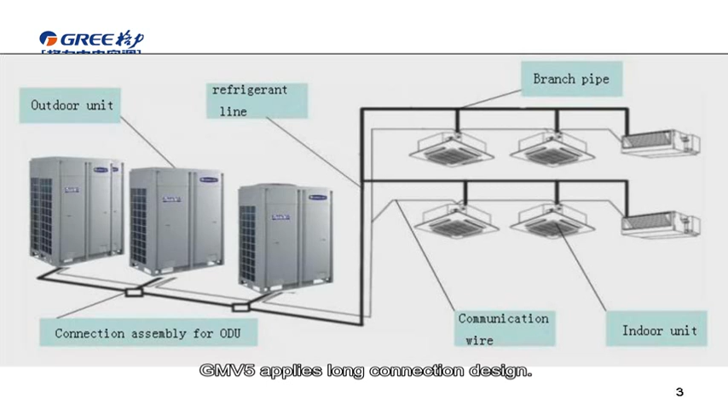The first part, product introduction, product installation features. Firstly, long connection pipe design. GMV5 applies long connection design. Maximum total pipe length reaches 1,000 meters. Maximum pipe length between indoor unit and outdoor unit reaches 165 meters. Maximum height difference between indoor unit and outdoor unit reaches 90 meters. Maximum height difference between indoor units reaches 30 meters. This design is adaptable to various complicated projects and greatly reduces installation difficulties.

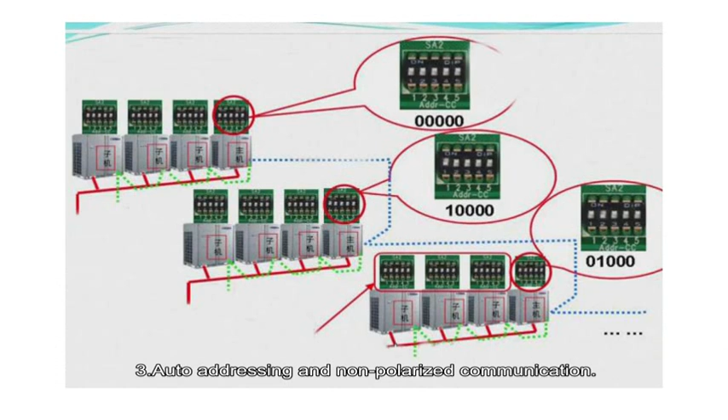Secondly, high static pressure design. When the unit is installed in the equipment room, relevant static pressure can be set according to the project status. The static pressure of GMV5 outdoor unit is up to 82 Pa. Thirdly, auto-addressing and non-polarized communication. Connection is flexible and installation is convenient.

The fourth, intelligent debugging. Debugging can be arranged through the button of outdoor unit and debugging software. During debugging, the system will track the quantity of indoor unit and outdoor unit and detect errors automatically. If there is an error, the unit will indicate the corresponding error so that the problems could be quickly solved.

The second part, installation project design. Firstly, model selection project design. A. Confirmation of operation environment. GMV5 can apply to office buildings, supermarkets, schools, hospitals, etc. Please select relevant type of unit according to the location. For some special sites with much dust and strong electromagnetic interference, sufficient evaluation and related measures shall be taken, such as adding filters and isolating power supply.

B. Confirmation of operation requirements. Please take sufficient communication with end users at the beginning of designing. Clearly understand users' operation demands, for example, indoor ambient temperature requirement, concrete object of using the unit, central control. C. Confirmation of project installation requirements. Communicate with the project consultant to see if the reserved installation space is sufficient and if the endurance of building is sufficient.

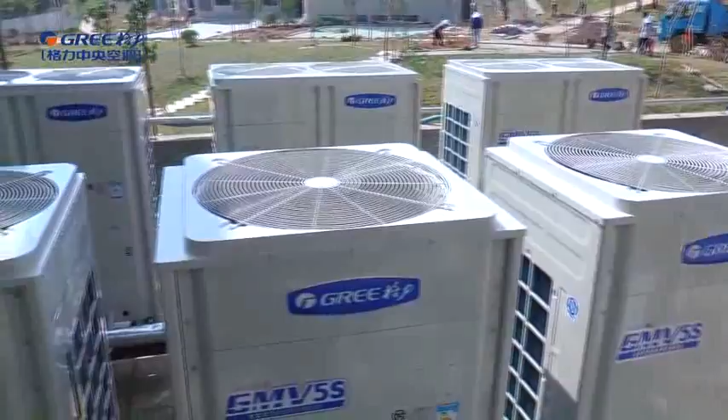D. Selection of relevant type of unit. Select the product according to the 3 basic requirements mentioned above. If the existing product cannot meet the requirement, please discuss with your pre-sales manager to work out a solution. The second part, installation project design. Installation project design includes: first, installation of outdoor unit. Second, installation of indoor unit. Third, installation of refrigerant pipeline. Fourth, installation of condensate pipe. Fifth, installation of power cable and communication cable.

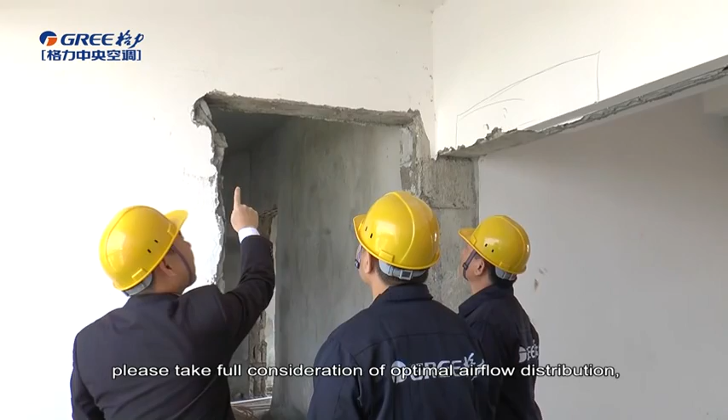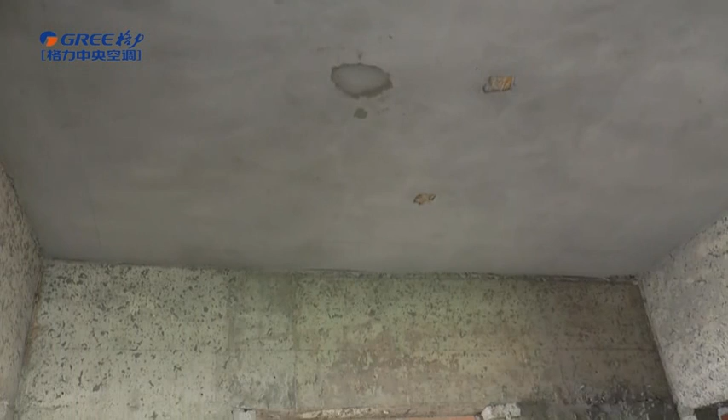Fifth, make sure the reserve power supply capacity and wire material comply with the requirement of the unit design. The power cable and communication cable shall be independent, and the parallel distance between them shall comply with the requirement of unit. The third part, unit installation. First, preparation before installation. Second, checking and installation of unit.

Installation security training. Personal safety is a top priority during the whole installation process. In this process, we must comply with related national and local safety regulations to ensure personal or property safety. Specialized workers must have professional certificates. For example, electricians, welders.

On-site review of design drawing. Installation team must carefully read and understand the design of scheme and drawings provided by engineering designers, and prepare detailed and feasible installation organization design after reviewing the on-site status. Note: installation team must strictly abide by the design drawings. If any design cannot be implemented during installation and needs to be modified, contact the designer first for approval and prepare a written document.

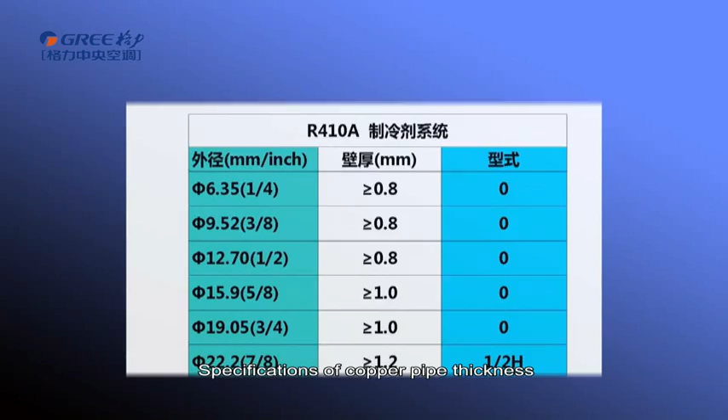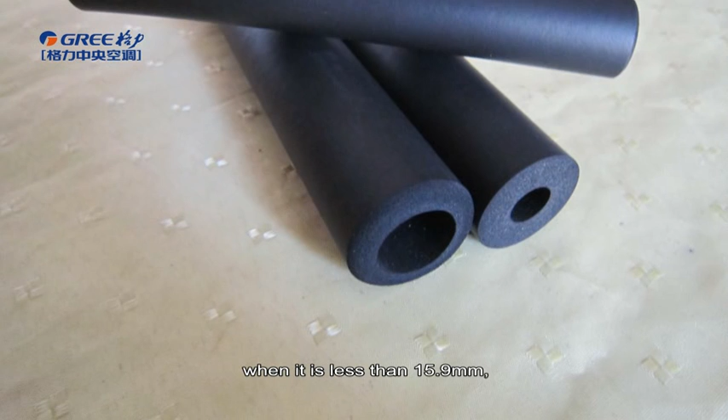Preparation before installation. Prepare the equipment before installation, including copper pipe, insulation material, hanger rod, and communication cable. All materials must comply with the design requirements. Specification of copper pipe thickness. The insulation material of copper pipe must be rubber foam insulation material with fire retardancy level of B1 or higher. When the diameter of copper pipe is equal to or greater than 15.9 millimeters, the thickness of insulation material should be at least 20 millimeters. When it is less than 15.9 millimeters, the thickness of insulation material should be at least 15 millimeters.

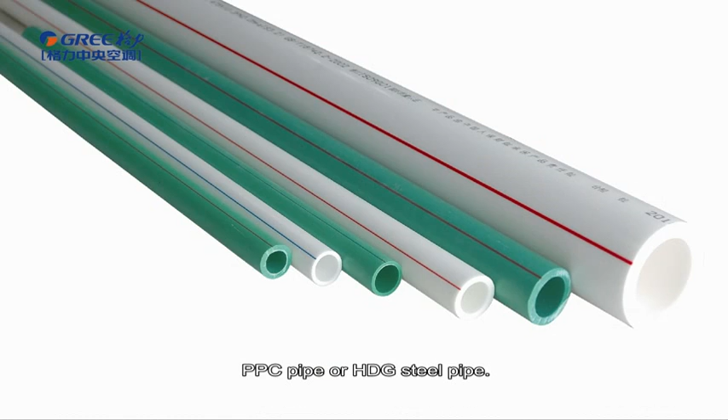Condensate pipe shall apply UPVC pipe, PPR pipe, PPC pipe, or HDG steel pipe. Communication cable shall apply twisted pairs copper wire with sectional area of copper core no less than 0.75 square millimeters.

For units installed in places with strong electromagnetic interference, shielded wire must be used as the communication cables of the indoor units and wire controller. The same goes for communication cables between indoor units and between the indoor unit and outdoor unit.

When all materials are prepared, please appoint a person responsible for keeping the materials appropriately to prevent them from dust, water, and fire. Preparation for installation tools. Prepare the following tools before installation: screwdriver, pliers, shifting spanner, pipe cutter, torque spanner, pipe pliers, pressure gauge, level bar, electric drill, electronic balance, vacuum pump.

Checking and installation of unit. Checking and installing unit. When the equipment is brought to the installation site, please open the carton boxes and check the indoor units, outdoor units, and accessories. To avoid rework due to equipment defect after finishing installation, install the units only after checking everything is okay. Checking indoor units.

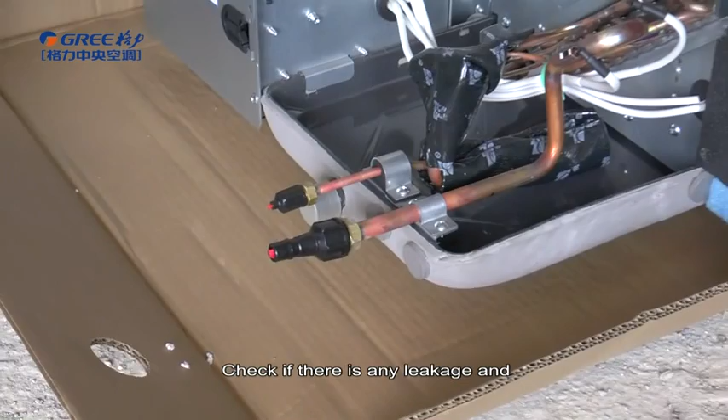Check if the appearance is good and accessories are equipped. Check if there is any leakage and if the pipeline is charged with refrigerant. Sticking the thimble of pipe joint. If there is gas discharge, it means that the unit is okay. Otherwise, please check if there is any leakage in the indoor unit or replace the indoor unit.

Checking outdoor unit. Check if the appearance is good and accessories are equipped. Check if there is any oil mark on the pipeline and traces. If there is oil mark, it means there is leakage in the outdoor unit. Please check the outdoor unit or replace it. Checking accessories. Check if the accessories are equipped with the unit according to the accessory list.

Installation of indoor unit. Steps to install the indoor unit. First, select the correct installation site. Second, drilling holes and fixing hanger rod. Third, fixing and installing indoor unit. Fourth, checking and adjusting level of indoor unit. Fifth, dust prevention.

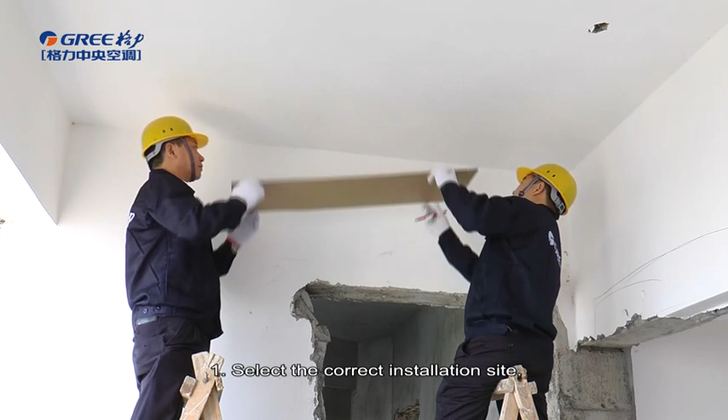First, select the correct installation site. Confirm the hole drilling location of suspending indoor unit with the reference cardboard provided in the indoor unit carton box. Note, take full consideration of pipeline installation and maintenance space during locating. Make sure there is no obstacle within 200 mm from the air return opening of duct-type indoor unit.

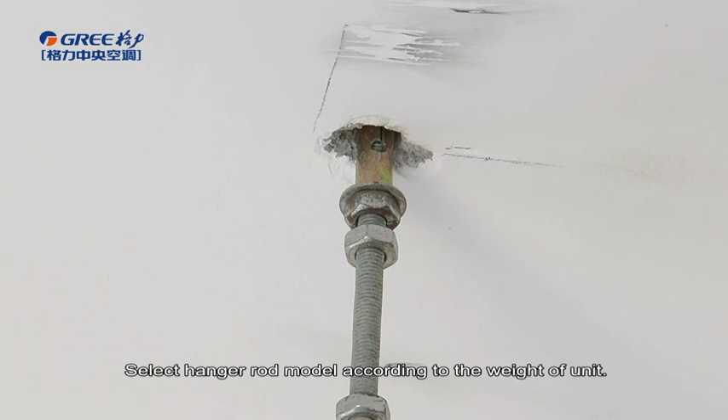Second, drilling holes and fixing hanger rod. Select hanger rod model according to the weight of the unit. For unit below 5 horsepower, M8 hanger rod shall be used. For unit above 5 horsepower, M10 hanger rod shall be used.

Third, fixing and installing indoor unit. In order to avoid accidents, several people shall cooperate for suspending the indoor unit. Please pay attention to the following points during installation. A. Indoor units shall be fixed independently and cannot share the same hanger branch with other equipment or pipeline. B. 4 pieces of hanger rod must be used during suspending. The hanger rods cannot be inclined after finishing installation of unit.

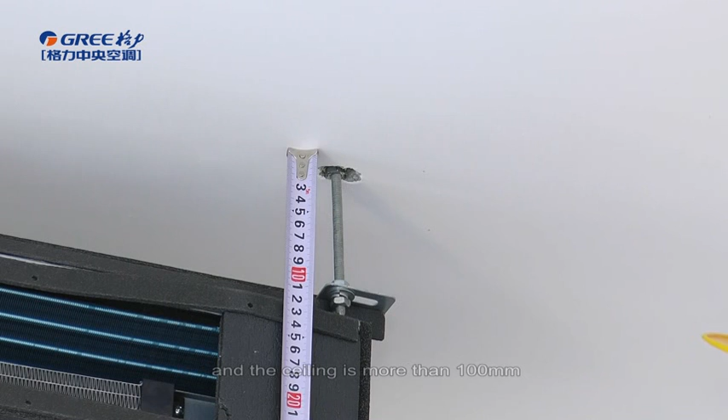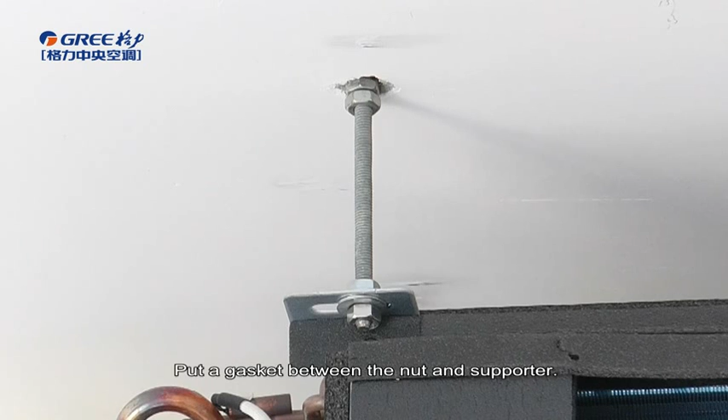C. Make sure the distance between the unit and the ceiling is more than 100 mm during installing indoor unit. D. Fix the indoor unit with 2 nuts in each hanger rod. Put a gasket between the nut and the supporter. Fix the hanger rod and floor with flat gasket and nut. If there is a special damping requirement, please put the damping gasket. If the hanger rod is longer than 1.2 meters, please apply 2 supports at the diagonal to avoid vibration.

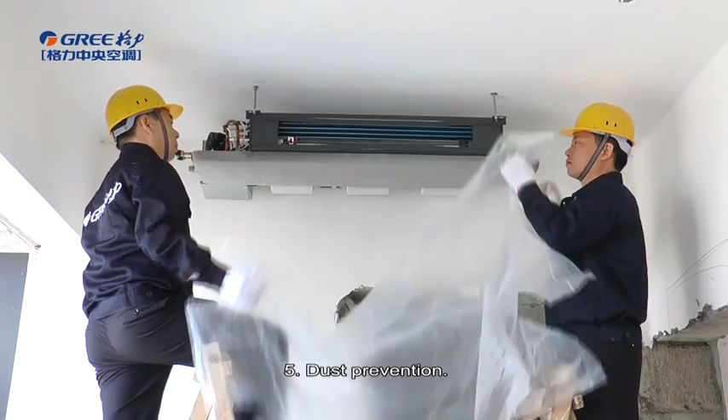Fourth, checking and adjusting level of indoor unit. After finishing installation, check the level of unit with level bar and make sure the unit is horizontal. The unit shall incline towards the drainage direction with height difference between 2 lifting lugs of 6 to 8 mm. Fifth, dust prevention. Wrap the unit with its plastic bag to prevent dust and impurities getting into the unit.

Installation of outdoor unit. Steps to install outdoor unit. First, prepare the foundation. Second, installation of damping rubber pad. Third, carry the outdoor unit. Fourth, fixing outdoor unit.

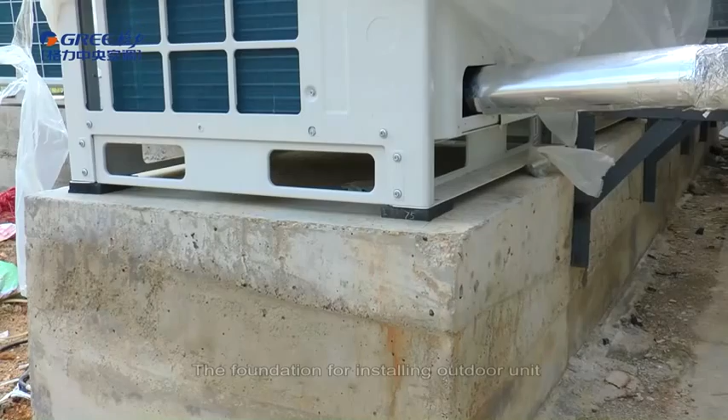First, prepare the foundation. The foundation for installing outdoor unit must be strong enough. Ensure that the drainage is smooth and that the ground drainage or floor drainage is not affected. We must use concrete foundation. Requirements on the concrete foundation are as follows. The concrete foundation must be flat and have enough strength to undertake the unit's running weight.

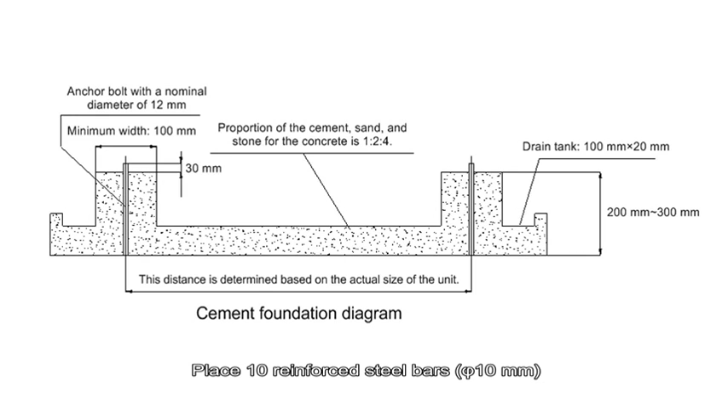The height of the foundation is 200 mm to 300 mm, which is determined based on the size of the unit. The proportion of the cement, sand, and stone for the concrete is 1 to 2 to 4. Place 10 reinforced steel bars with a space of 30 mm among each other. Clear the oil stains, crushed stones, dirt and water in the reserve borehole of the foundation, and install a temporary cover before installing bolts.

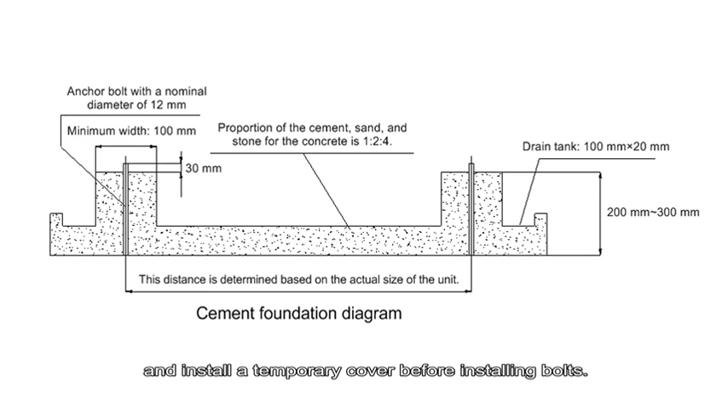Build a drainage ditch around the foundation to discharge the condensate water. If the unit is installed on the roof, please check the intensity of the building and take waterproof measures. If a U-steel foundation is adopted, the structure must be designed with sufficient rigidity and strength.

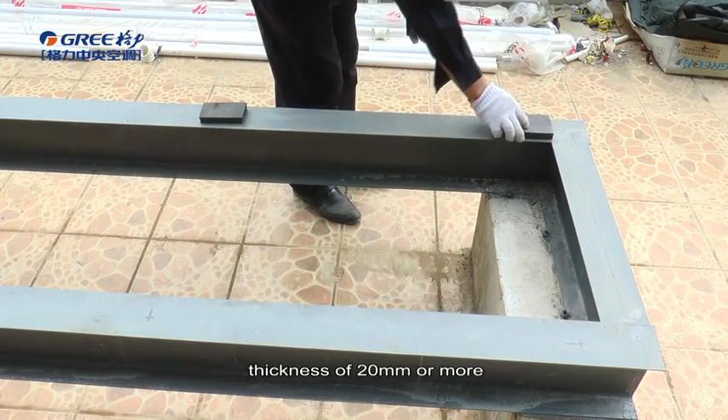Second, installation of damping rubber pad. Please apply a damping rubber pad with thickness of 20 mm or more and width of 100 mm or more between the outdoor unit and the foundation.

Third, carrying outdoor unit. Choose a suitable crane according to the weight of outdoor unit. The rope shall go through the carrying holes at the base. The unit cannot be inclined during carrying. Fourth, fixing outdoor unit. Fix the outdoor unit to the foundation with 4 M12 bolts securely to reduce vibration and noise.

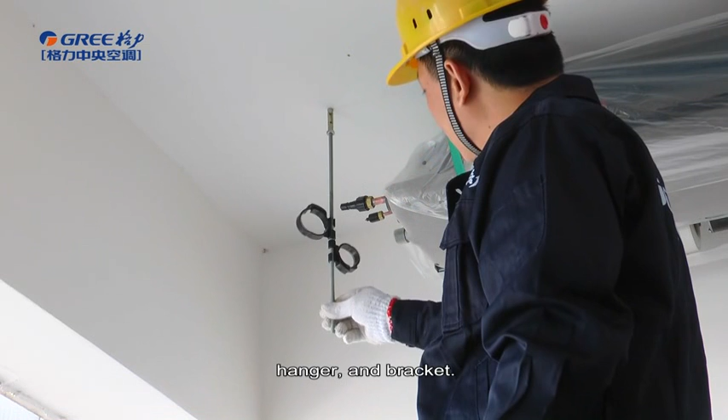Installation of refrigerant pipes. Steps to install the refrigerant pipes are as follows. First, preparing and installing the support, hanger, and brackets. During preparing and installing, choose the corresponding specification according to size of pipeline. If they are too small, the pipeline will be squeezed and insulation performance will be affected. If they are too big, it will be a waste of money and the pipeline cannot be fixed properly, which may cause vibration.

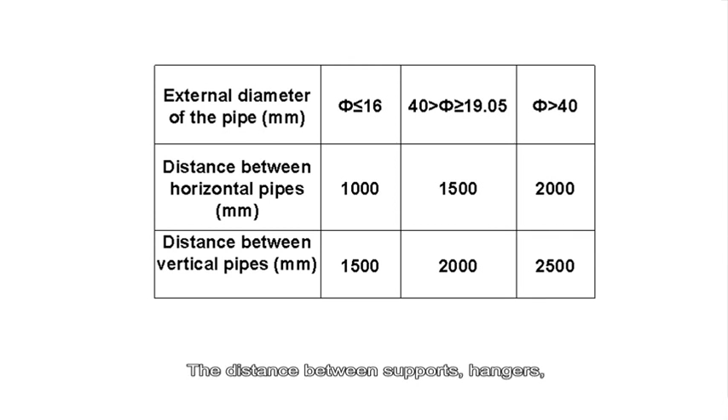The style and workmanship of supports, hanger, and brackets must follow the local standards. The distance between supports, hangers, and brackets is as shown in the diagram. The pipe led through a wall or beam must be fixed by a support, hanger, or bracket on both ends at a position 300 mm away from the hole.

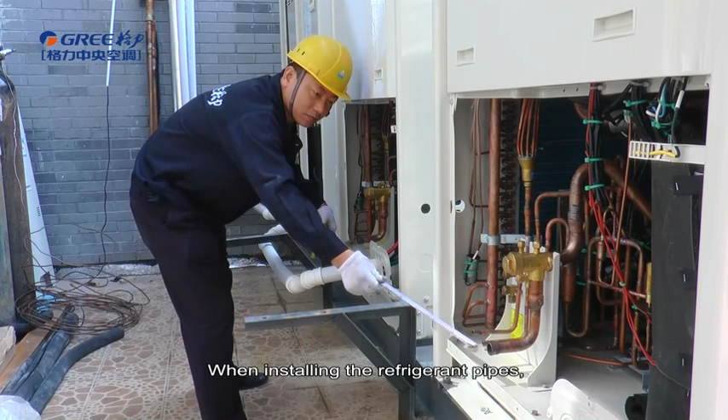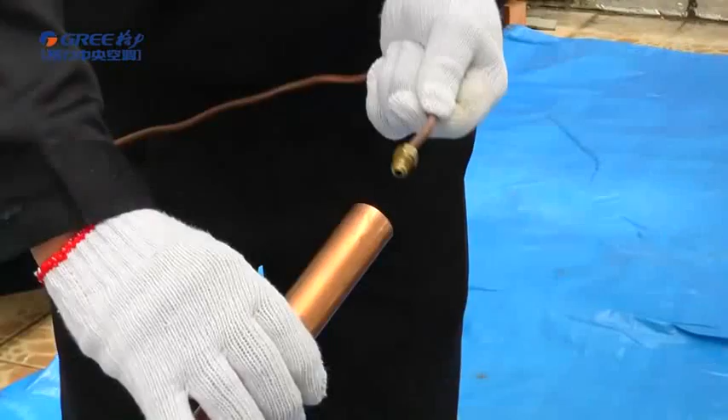Second, cleaning and processing the pipe. When installing the refrigerant pipes, please ensure the directions and branches are correct within minimum length. Use minimum number of braze welding junctions and elbows. There are two ways to clean the pipes. The first way is cleaning straight pipes with a piece of silk cloth. Apply some chlorine to the cloth. Push the cloth in one end of the pipe and pull out from the other end repeatedly to remove the sundries in the pipe. The other way is cleaning coils by blowing nitrogen through the pipe.

After cleaning, cover both ends of the pipe with sealing caps or adhesive tape immediately to avoid sundries getting into the pipe. Third, pipeline insulation. When adding the insulation sleeve, please select the sleeve specification according to the copper pipe diameter. Users cannot cut the insulation sleeve apart.

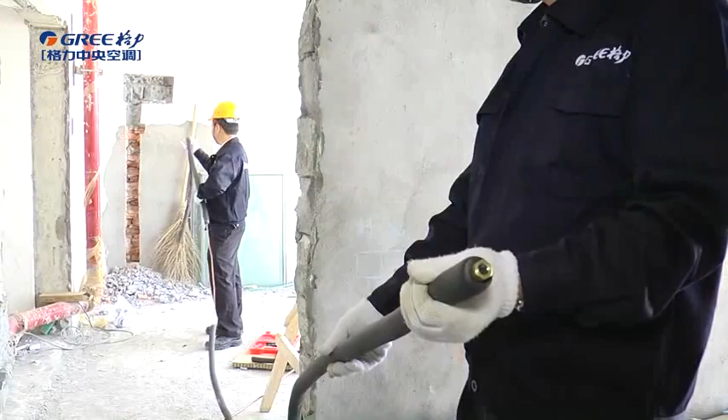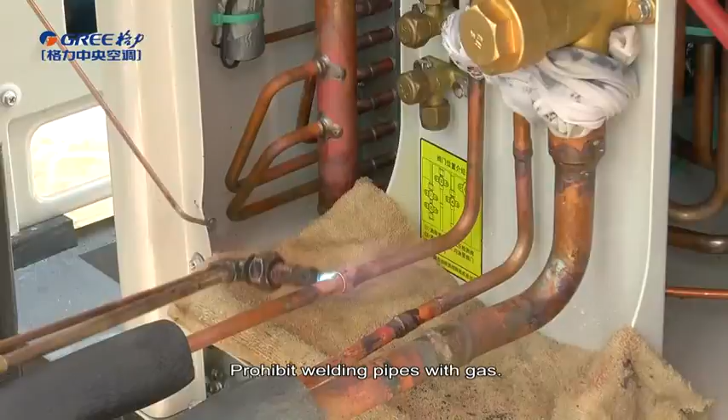Fourth, connecting and fixing the pipe. During welding the pipeline, please follow the regulations strictly. Prohibit welding pipes without charging nitrogen. Prohibit welding pipes with gas. Prohibit fixing the pipe too tightly or too loosely. Please adjust the flexuous pipe strictly. Before connecting the flare opening of the pipe to the indoor unit, please clean the pipe first and then arrange welding or connection.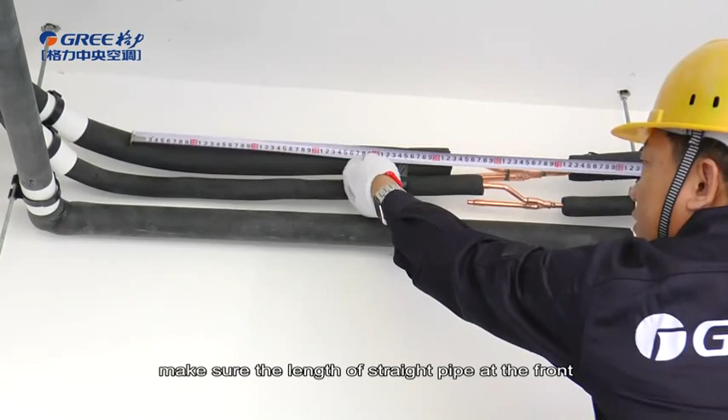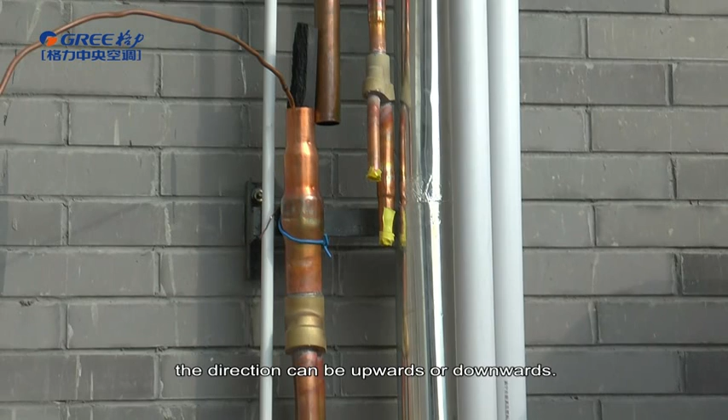Installation of branch pipe. Requirements of branch pipe installation are as follows. A. Ensure that the branch pipe model is correct. B. During installing branch pipe, make sure the length of straight pipe at the front and at the back of the 3 connection pipes is no less than 500 mm. C. There are 2 methods of branch pipe installation. A. In horizontal installation, the 3 ports must be on the same level. The shaping size and assembly angle cannot be changed. B. In vertical installation, the direction can be upwards or downwards. 3 ports must be on the same elevation without inclination.

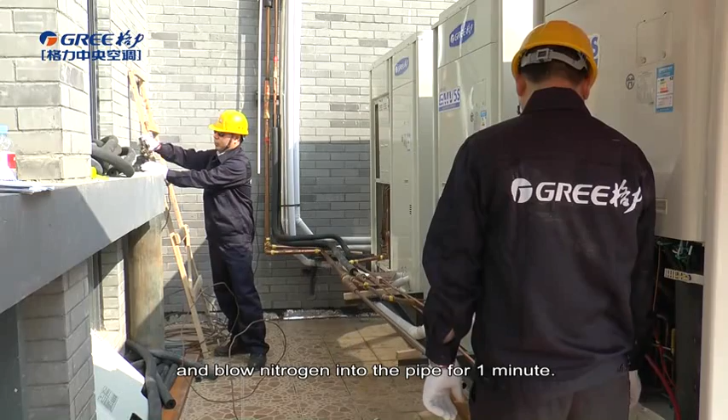D. Ensure that the branch pipe is close to the indoor unit to reduce impact on refrigerant assignment by indoor unit branches. Fifth, cleaning the contaminants of pipe system. Firstly, connect a pressure regulation valve on the nitrogen cylinder to the gas pipe in the outdoor unit. Regulate the nitrogen pressure to about 0.5 megapascal and blow nitrogen into the pipe for 1 minute. Repeat this operation for 3 times till the dirt and water are discharged. After cleaning the gas pipe, perform the same operation to clean the liquid pipe.

6th, airtight test. Refrigerant leakage may affect functions of the units or even damage the compressor. If refrigerant leakage is detected after the system is installed, it is very difficult to locate the leaking point as the suspended ceiling has been decorated. Therefore, the airtight test must be performed before ceiling for indoor decoration is finished. Please follow the operation instructions in the service manual. Note, during the airtight test, prohibit connecting the pipeline of outdoor unit.

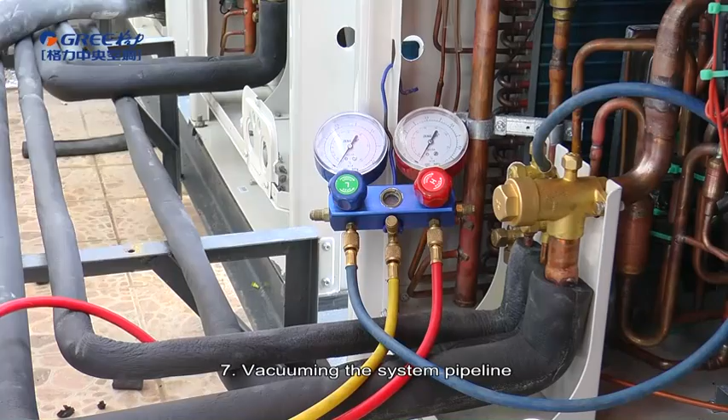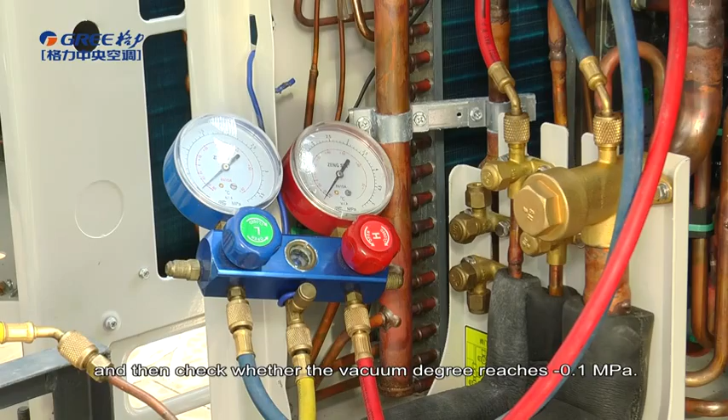7. Vacuum the system pipeline. After finishing the airtight test, please connect the outdoor unit pipeline to arrange vacuum. The air discharge capacity of the vacuum pump must be greater than 4 liters per second. The precision of the vacuum pump must be greater than 0.02 millimeters of mercury. After connecting the vacuum pump, let the vacuum pump operate continuously for 4 hours and then check whether the vacuum degree reaches minus 0.1 megapascal. If not, leakage may exist and please perform leakage check again. If no leakage exists, continue to vacuum for 2 hours.

If the vacuum degree cannot meet the standard after vacuuming twice, there may be water in the pipe when it is confirmed that no leakage exists. In this case, discharge water by blowing nitrogen. Perfuse nitrogen at 0.05 megapascal to the pipe, and then vacuum for 2 hours and keep the vacuum for 1 hour. If the vacuum degree of minus 0.1 megapascal cannot be reached, repeat this operation till water is discharged. After vacuuming, turn off the regulation valve and keep for 2 hours. If the pressure of the regulation valve does not increase, vacuum is passed.

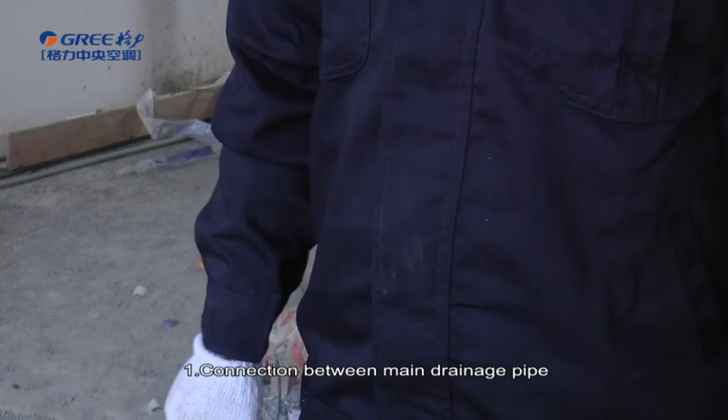Installation of condensate pipe. First, connection between main drainage pipe and drainage pipe of indoor unit. A ventilation hole must be provided on the top of the drainage pipe to discharge condensate water smoothly. Perform a test with some water and another test with full water in the pipe after connecting the pipe. Check whether drainage is smooth and whether water leakage exists in the pipe system.

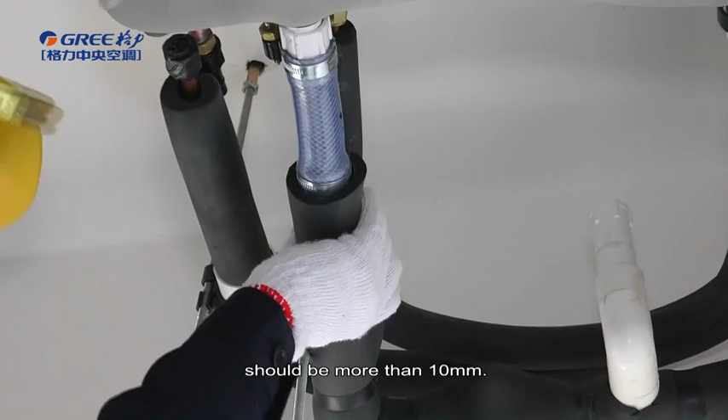The insulation layer thickness of condensate pipe should be more than 10 millimeters. Bond the insulation material joints with specialized glue. Then wrap them with plastic adhesive tape. The width of the adhesive tape is more than 5 centimeters to prevent dewing.

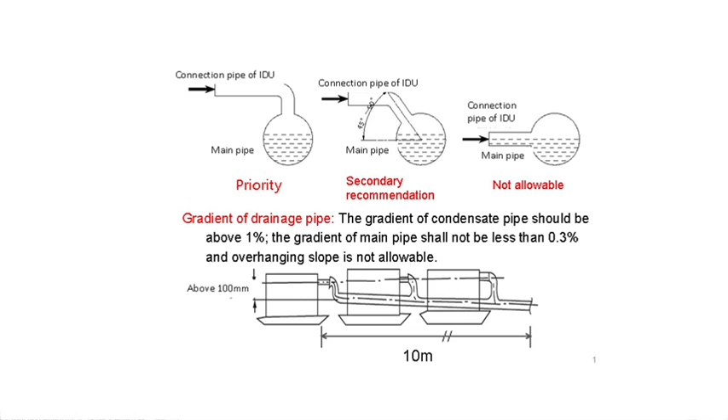Third, the inclination degree of the condensate pipe must be above 1% and that of the main pipe cannot be lower than 0.3%. Adverse slopes are not allowed. Fourth, when connecting three-way pipes, the two-way straight pipes must be laid on the same slope.

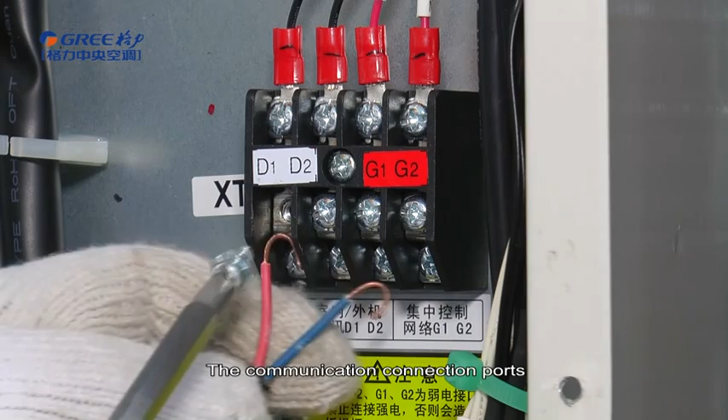Installation of communication cable. The communication connection ports between indoor units are D1 and D2. The communication connection ports between indoor unit and wire controller are H1 and H2. In communication installation, please differentiate the communication cable and power cable clearly. If they are connected wrongly, the main board of the indoor unit may be damaged. Go through pipe and connect wire independently.

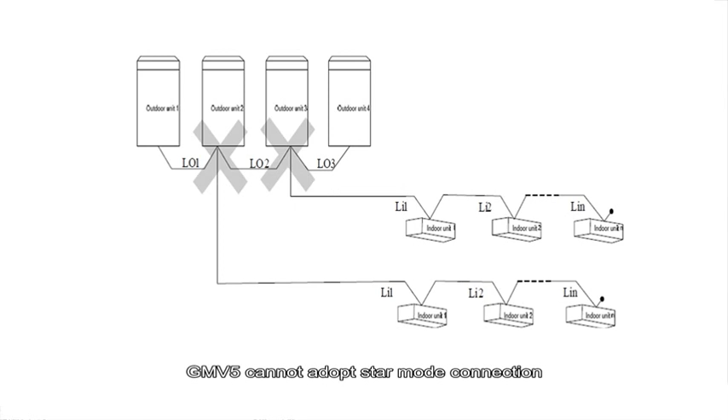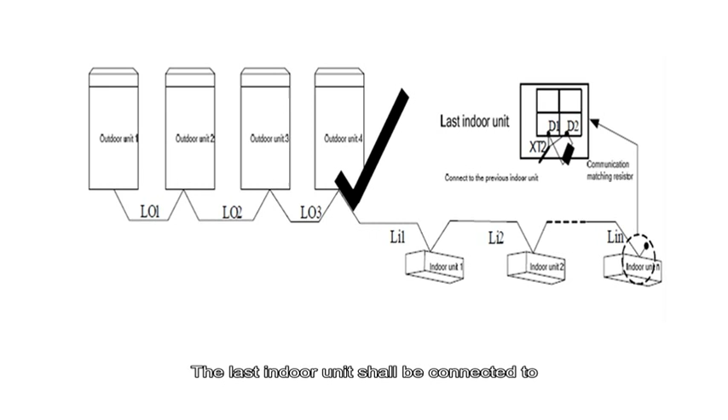GMV5 cannot adopt star mode connection. GMV5 must adopt bus type communication way. The outdoor unit at the beginning of communication shall be set as master outdoor unit. The last indoor unit shall be connected to a communication matching resistor. The resistor is placed in the package of outdoor unit.

Installation of power cable. Precautions of installing power cable. Ground cable must be connected. The yellow-green wire inside the unit is the grounding wire. It cannot be used for other purposes or be cut off. Do not fix it with tapping screws, otherwise an electric shock may be caused. A reliable ground terminal must be provided for the power.

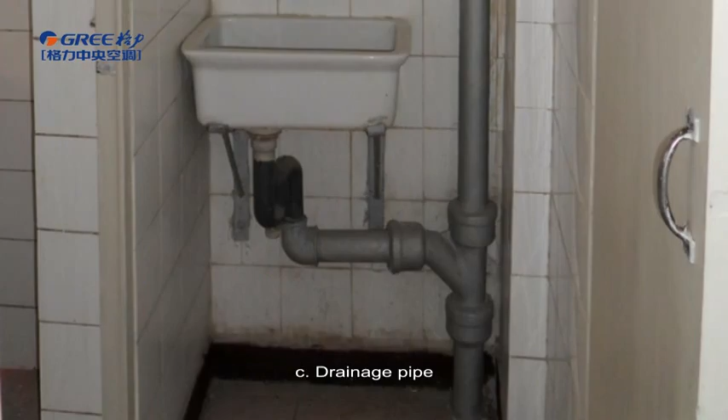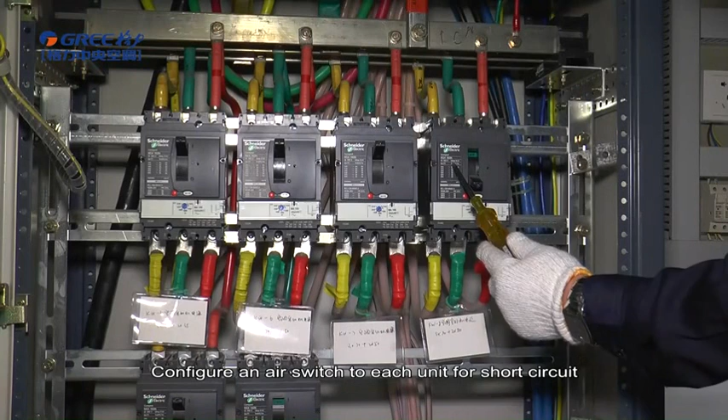Do not connect the ground cable to any of the following: A. Water pipe, B. Gas pipe, C. Drainage pipe, D. Other unreliable places. The power cable and the communication cable must be laid separately with a distance of greater than 20 centimeters. Configure an air switch to each unit for short-circuit and overload protection. In addition, configure a general air switch to switch on or switch off the total power of indoor units and outdoor units.

Unit commissioning. First, notes. A. It is forbidden to directly connect the compressor with power supply and forcibly power it on during debugging and maintenance. B. Debugging must be performed on the GMV system before system operating. C. If the GMV system is not in debugging, the mainboard of outdoor unit displays module address of 0F A0 and that of indoor unit displays A0.

D. An outdoor unit must be set as master module and only one master module can be set during debugging. E. An indoor unit must be set as master indoor unit and only one can be set during debugging. F. Please keep the factory settings if there are no special requirements. G. Debugging can be performed even when the wire controller is not connected. It can avoid damage on the wire controller.

Second, preparation for debugging. A. Make sure that the following tools are prepared before debugging. B. Make sure that the debugging software is correct before debugging. C. Make sure that all required files and parameters are prepared. Third, check the system before debugging. System checking mainly includes: first, check the installation environment. Second, check the appearance of units. Third, check the refrigeration system. Fourth, check the electrical system.

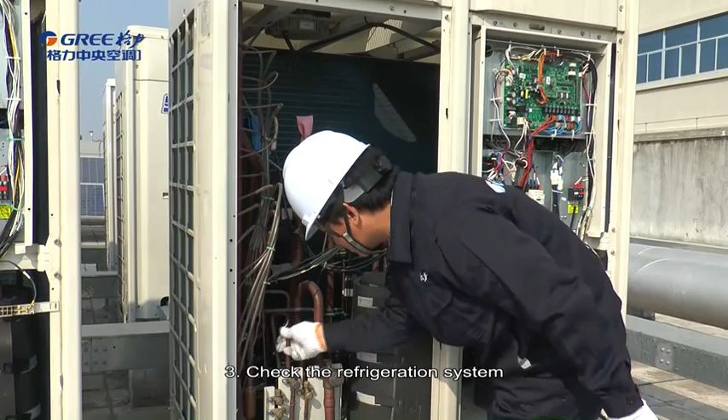Third, check the refrigeration system. Before debugging, make sure that the cut-off valves are fully opened. Check whether there is any oil leakage around the valve.

Fourth, check the electrical system. A. Check for high electromagnetic interference, dust, and acid or alkaline gas in the operating environment. B. Check the surface of power cable. C. Check the power capacity required for the unit. D. Check the installed air switch model, fuse model, and their using methods. E. Check the components in the electrical box. F. Check the input power and check power consistency.

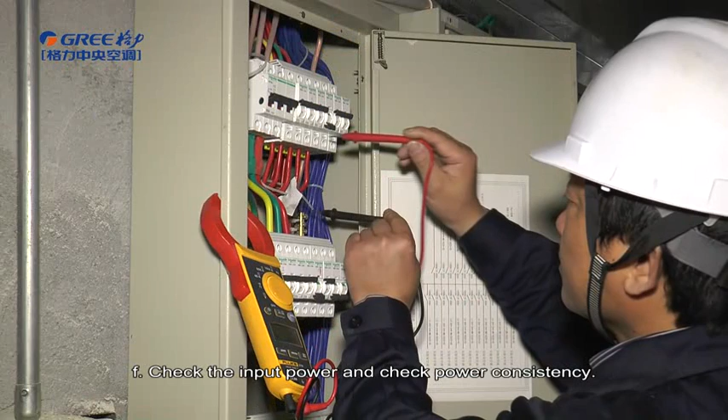Check phase sequence. After powering on the unit, measure whether the value of power supply is normal. Check communication system. Before debugging, make sure the communication cable and power cable are connected correctly.

Debugging process. Precautions before starting debugging. First, before starting debugging, make sure that the unit compressor has been preheated for more than 8 hours. Check whether preheating is normal by touching the compressor. Debugging can be started only when preheating is normal, otherwise the compressor may be damaged. Second, when debugging is started, the system will select an operation mode according to the ambient temperature automatically.

Third, before starting debugging, make sure again the cut-off valve of outdoor unit has been completely open. Fourth, during debugging, the front panel of outdoor unit must be completely covered. Otherwise, debugging accuracy may be affected. Fifth, before debugging, make sure that the additional refrigerant charging to the system has finished completely or for more than 70%.

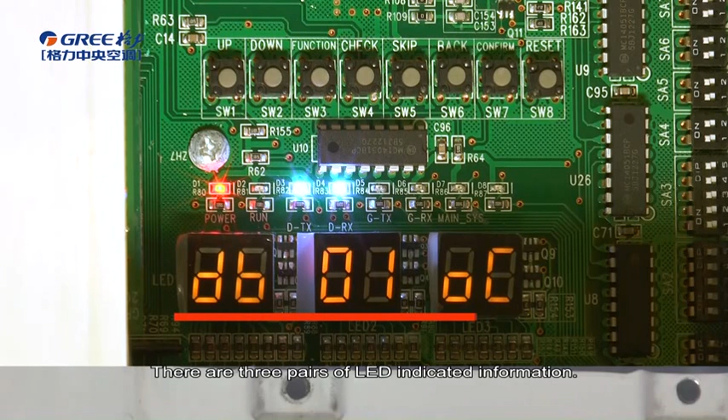Introduction of debugging methods. GMV 5 provides two debugging methods. One is to perform debugging through the mainboard buttons of outdoor units. This method doesn't need specialized tools and can be performed by engineer on site. There are three pairs of LED indicated information. LED 1 shows the debugging code, LED 2 the debugging progress code, and LED 3 the debugging status.

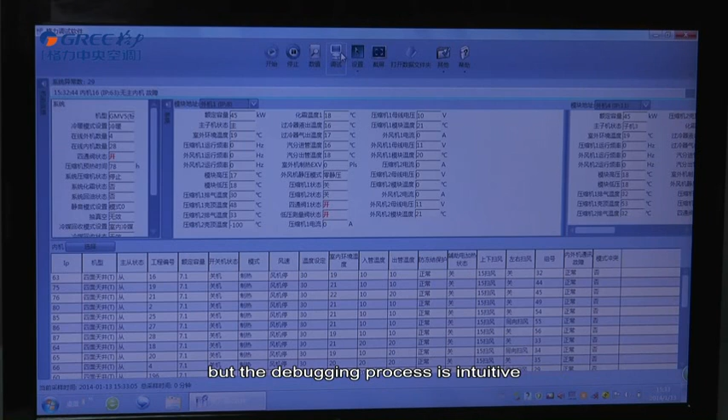The other is to perform debugging through professional software. In this method, connecting computer is required, but the debugging process is intuitive and real-time detection of operation parameters is available. Next, detailed steps of the two debugging methods will be given.

Debugging through the mainboard buttons. Step 1. Completely cover the front panel of outdoor unit and open debugging windows of all basic modules. Step 2. In power off status, set the outdoor unit to a corresponding static pressure mode according to the static pressure design requirement for outdoor unit. For more details about the setting method, please read the installation, debugging, and maintenance manual. If there are no static pressure requirements, keep the factory settings.

Step 3. In power off status, set one outdoor unit as master unit by keeping its SA8 dip switch in 00 factory setting status. Set other modules as slave module by setting SA8 dip switch to 10.

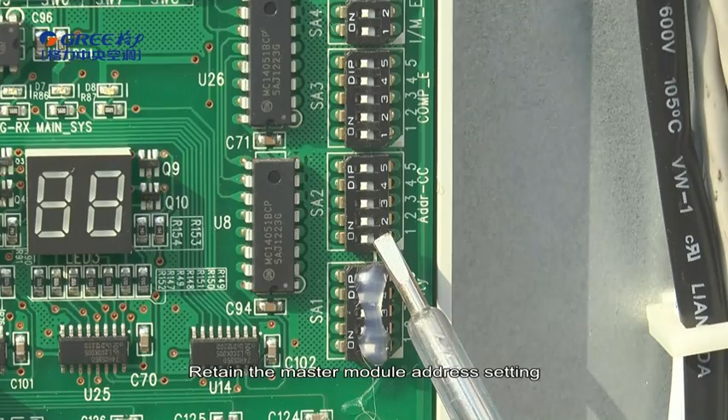Step 4. If centralized control is required, set the centralized control address SA2 in power off status of outdoor unit. Retain the master module address setting of one system in 00000 status. The centralized control addresses SA2 of other systems' master modules cannot repeat. Note, you could retain default settings for slave modules, and it is not needed to set the slave module SA2 dip switches of all systems. If centralized control is not required, you could keep default settings, and it is not needed to set this dip switch.

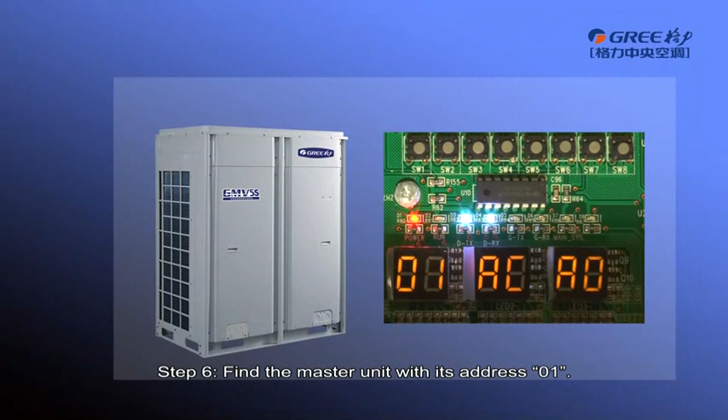Step 5. Power on all outdoor units and indoor units. If LED 3 displays A0 on the mainboard of all outdoor units, it indicates that the unit is on the non-debugging status. Step 6. Find the master unit with its address 01. On the master unit, press Confirm button for 5 seconds to begin debugging.

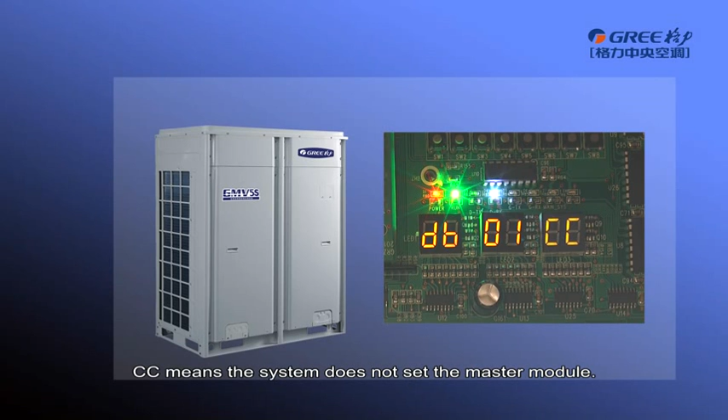Step 7. Wait for the unit to operate debugging step 1 and 2 automatically. If the master module is incorrect, error code CC or CF will display on the LED 3. CC means the system does not set the master module. CF means the system has more than 2 master modules. When the master module has been set successfully, LED 3 will display OC and it will enter step 2 automatically.

If no master indoor unit is detected in step 2, LED 3 will display error code L7. In this case, all outdoor unit buttons are temporarily not functional. Users can set the master indoor unit through debugging software, wire controller, or remote controller within 1 minute. If no master indoor unit is set within 1 minute, the system will set a master indoor unit automatically. Then the system enters the next step automatically.

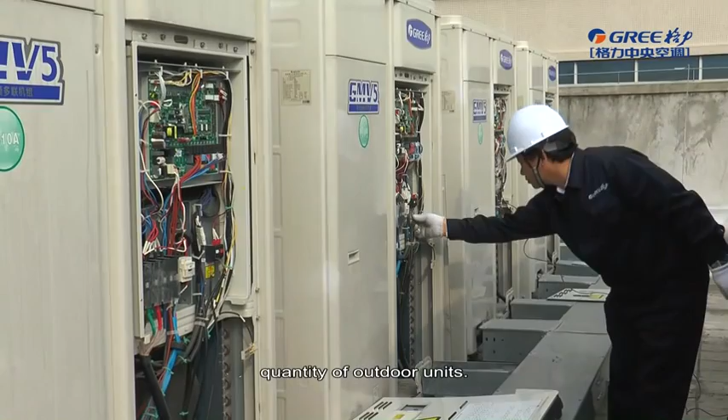Step 8. Step 3 is to confirm quantity of outdoor unit. If the display quantity is consistent with the actually connected units, the unit enters step 4 automatically. If the display quantity is inconsistent with the actually connected units, power off the outdoor units and check whether the communication cables are connected correctly. Then perform debugging again. Note, it is very important to confirm the quantity of outdoor units. If the confirmed quantity is inconsistent with the actual quantity, the system may run improperly.

Step 9. Step 4 is to confirm the quantity of indoor units. If the display quantity is consistent with the actually connected indoor units, please press Confirm button to enter Step 5. If the display quantity is inconsistent, please check whether each indoor unit is powered on and then check whether communication cables are connected correctly.

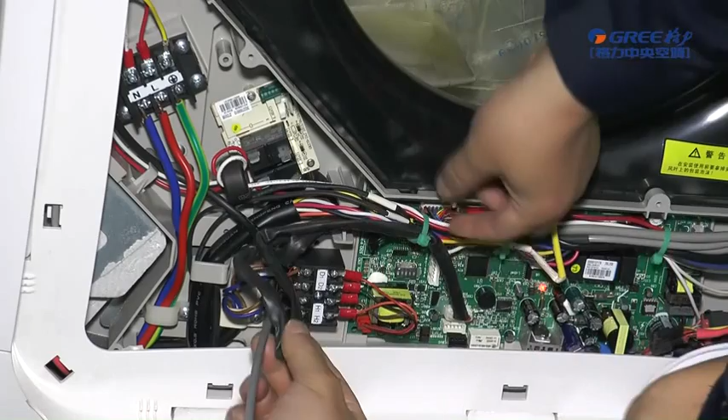Note, it is very important to confirm the quantity of indoor units. If the confirmed quantity is inconsistent with the actual quantity, the system may run improperly.

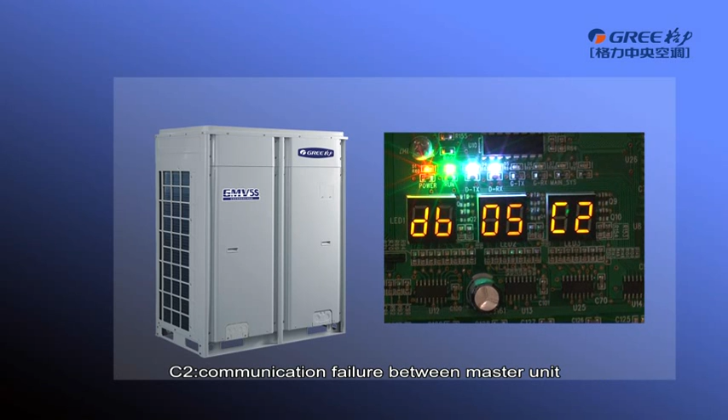Step 10. Step 5 is unit internal communication and capacity matching detection. If the detection is abnormal, the unit will retain the current status. The errors could be C3, communication failure between master unit and fan driver. C2, communication failure between master unit and compressor driver.

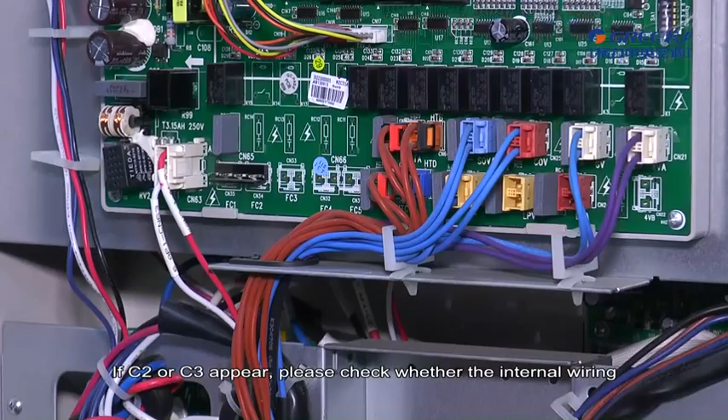CH, rated capacity ratio between indoor unit and outdoor unit is too high. CL, rated capacity ratio between indoor unit and outdoor unit is too low. If C2 or C3 appear, please check whether the internal wiring and the mainboard are in good condition.

If CH or CL appear, please increase or decrease indoor unit quantity to ensure the ratio within 50 to 135%. If LED 3 displays OC, the unit will enter the Step 6 automatically.

Step 11. The Step 6 is outdoor unit electric component detection. If the detection is abnormal, the unit will retain the current status. If the detection is OK, OC will display on LED 3 and the unit enters the Step 7 automatically.

Step 12. The Step 7 is indoor unit electric component detection. If the detection is abnormal, the unit retains the current status. The LED 3 displays the 4-digit project number of the indoor unit. The corresponding error code will be displayed after 3 seconds.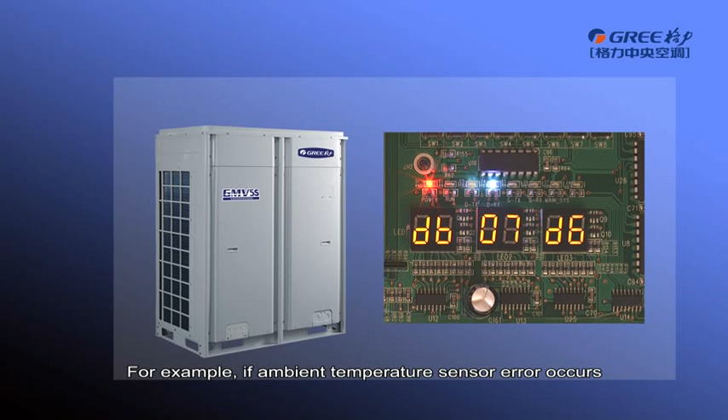For example, if ambient temperature sensor error occurs in indoor unit number 16, LED 3 will display 00 first and then display 16, and display error code d6. In this case, please confirm whether connection is correct and replace the sensor until error disappears. If the detection is OK, LED 3 should display OC and the unit enters the Step 8 automatically.

Step 13. The Step 8 is compressor preheating confirmation. If it is detected that the compressor preheating period is less than 8 hours, error code U0 will be displayed. Therefore, please preheat the compressor in advance. If it is detected that the compressor preheating period is more than 8 hours, the unit will enter Step 9 automatically.

Note, if preheating period reaches 8 hours while the unit shall be powered off, the power off period shall not exceed 2 hours. Otherwise, preheating shall be arranged again.

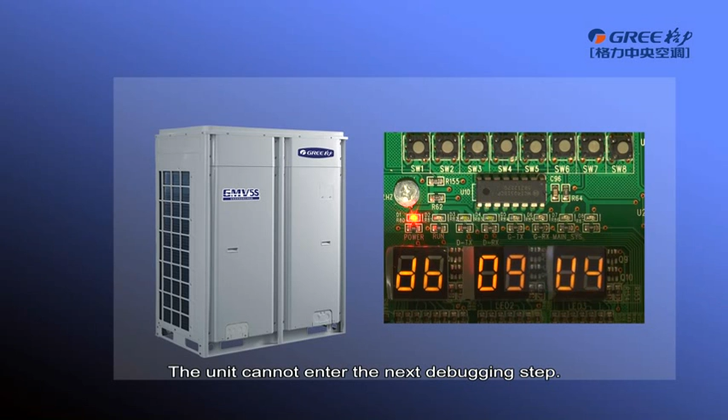Step 14. The Step 9 is about the pre-startup refrigerant confirmation. If no refrigerant in the system or the refrigerant amount does not meet the system startup requirement, error code U4 will be displayed. The unit cannot enter the next debugging step. In this case, check for leakage or charge refrigerant till the U4 disappears. If the refrigerant amount meets the system startup requirements, the unit will enter the Step 10 automatically.

Step 15. The Step 10 is pre-startup outdoor unit valve status detection. If LED 3 of master module displays on, it indicates that the unit is being enabled. If LED 3 displays U6, it is required to check again whether the outdoor unit valves are open completely. After confirming that all valves are open completely, press Confirm button to enter the Step 11.

Step 16. In the Step 11, the system verifies refrigerant charging amount. This step needs no operation, just for indicating refrigerant charging amount. Step 17. The Step 12 is unit debugging startup confirmation. Confirm again all preparations are completed. Then enable the unit to debugging process.

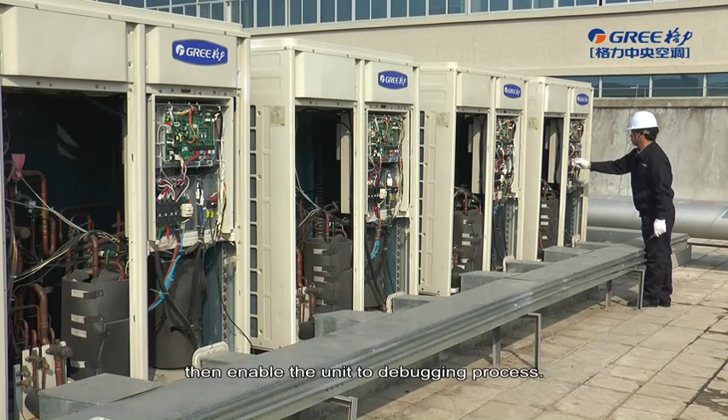If LED 3 of master module displays AP, it indicates that the unit is waiting for enable confirmation. If it is confirmed to enable the unit, press Confirm button. LED 3 displays AE, and the unit enters the Step 13 automatically.

Step 18. After unit startup confirmation, the system automatically selects the cooling or heating mode according to the environment temperature. If LED 3 of master unit displays AC, it indicates that the unit is in cooling mode. If LED 3 of master module displays AH, it indicates that the unit is in heating mode.

Debugging through the debugging software. Firstly, we will show you the required hardware and connection way. You need laptop, Gree USB data converter kit, communication cable, cross screwdriver. Gree USB data converter kit includes software installation CD, data converter, and USB data line. Note: please use the specialized data converter during debugging.

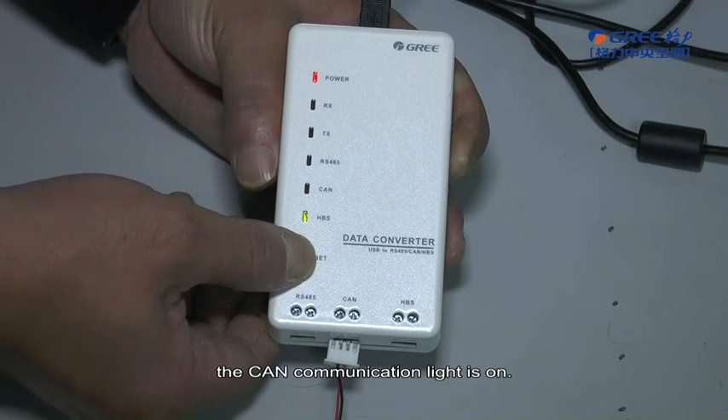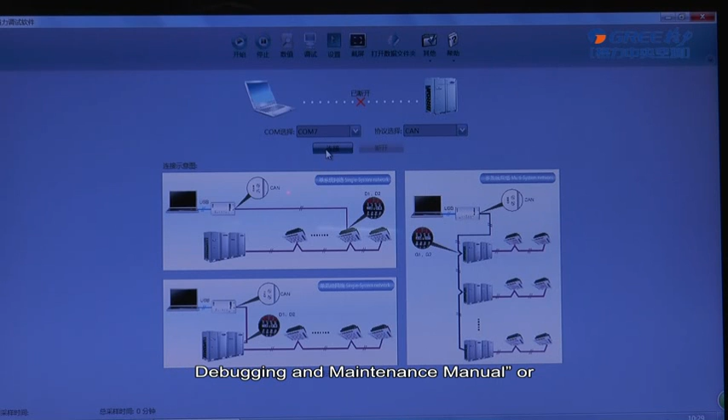Software installation. Put the software installation CD into the laptop. After finishing installation, run the debugging software. For more details, please read the Installation, Debugging, and Maintenance manual or Gree USB Data Converter instruction manual.

Debugging process. Step 1 to Step 5 are the same as the method of debugging through the outdoor unit. The debugging from Step 6 is as follows. Firstly, click Connect to switch the debugging software to the debugging control interface. Click Debug to switch to the engineering debugging interface. Click Start to enter the debugging function, and the software performs debugging automatically.

Related icon is displayed to indicate that debugging passed or is still being performed. For the phase with OK displayed, a manual confirmation is required for entering the next debugging step. Click this icon to display online unit quantity, which provides reference for selection. Click Close to close the information.

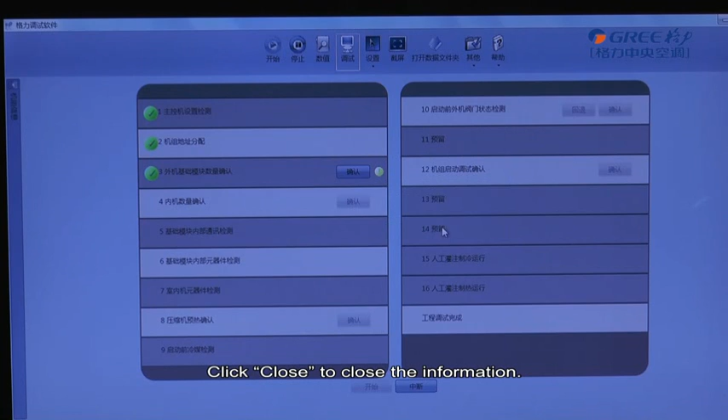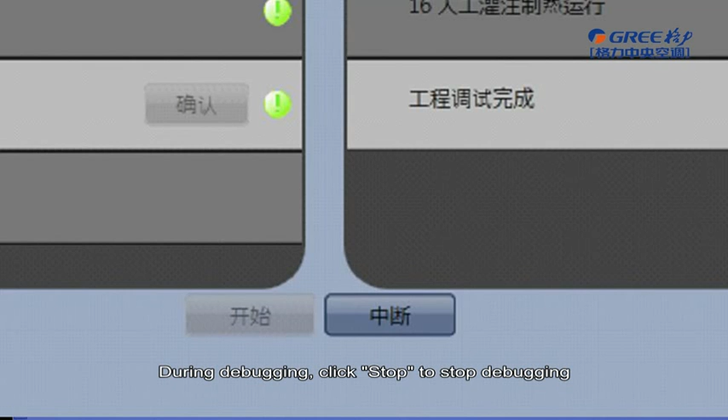Related icon is displayed to indicate that debugging is not passed on the phase and troubleshooting is required. After troubleshooting, the unit enters the next step automatically if no OK exists. Otherwise, click OK to enter the next step. Click the related icon to display relevant information detected on this phase, which provides reference for troubleshooting. During debugging, click Stop to stop debugging, and then click Start to continue debugging till debugging ends.

Back and Skip are provided in Step 10, outdoor unit valves check before startup. When Step 10 is abnormal, click Back to return to Step 9. Click OK in Step 9 to perform debugging again for Step 10. If a U6 fault occurs in Step 10, users can click Skip to skip the fault. For other faults, skip is unavailable.

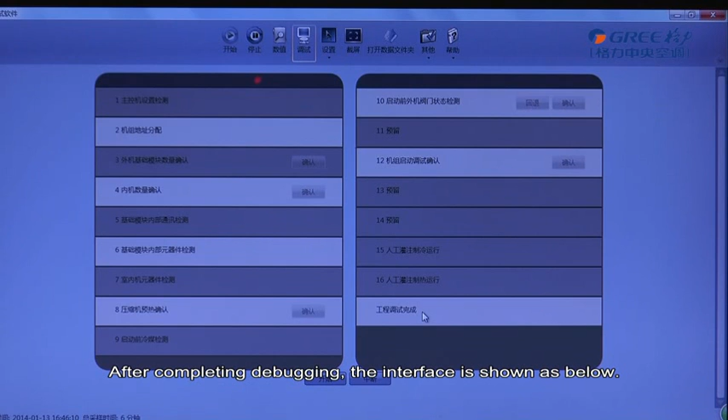Debugging steps 11, 13, and 14 are reserved. Step 12 is the debugging confirmation step. Steps 13, 14, 15, 16 are parallel steps. After completing debugging, the interface is shown as below. Green icon is displayed on project debugging completion step to indicate that project debugging is completed and the whole computer debugging steps are finished. Sort and save data.

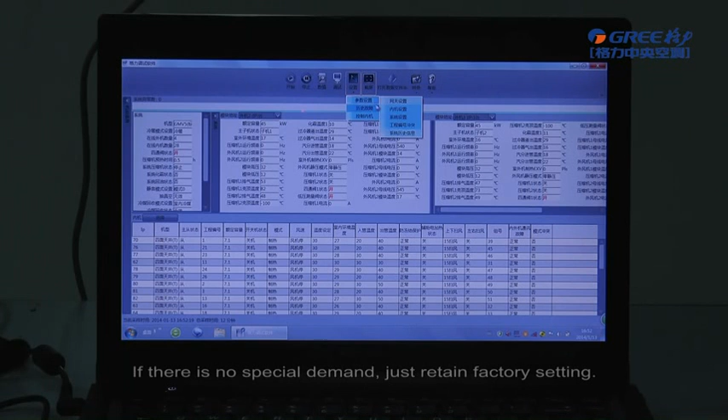Make detailed records of abnormalities and troubleshooting method during debugging for later maintenance and inquiry. At last, make a debugging report and hand it over to users. Engineering function setting. When debugging is completed, set the related functions of unit according to actual engineering function demand. For more details about the setting method, please read the Installation, Debugging and Maintenance Manual. If there is no special demand, just retain factory setting. It is better to tell the customer which is the master indoor unit and stick the label.

Fifth, operation of wire controller and door control system. Door control functions. The wire controller of GMV5 can be connected with door control device in order to control the unit on or off. The unit will stop when removing the keycard and resume previous operation status when connecting the keycard. Connection between hotel wire controller and door control system. First, only connecting the hotel wire controller. The indoor unit can only be connected with hotel wire controller and then the hotel wire controller is connected with door control system. In this case, the unit can be turned on or off by inserting or removing the keycard.

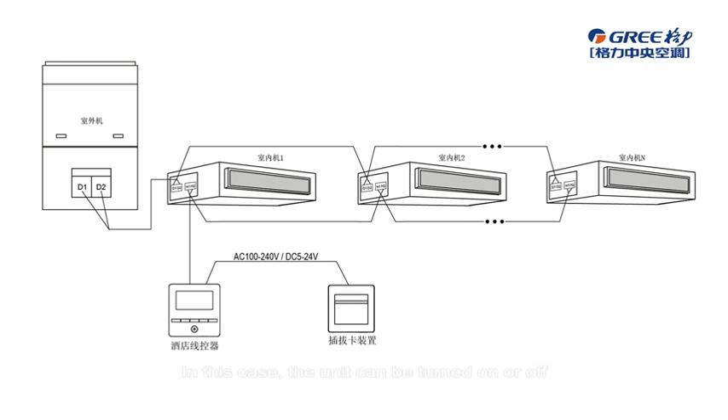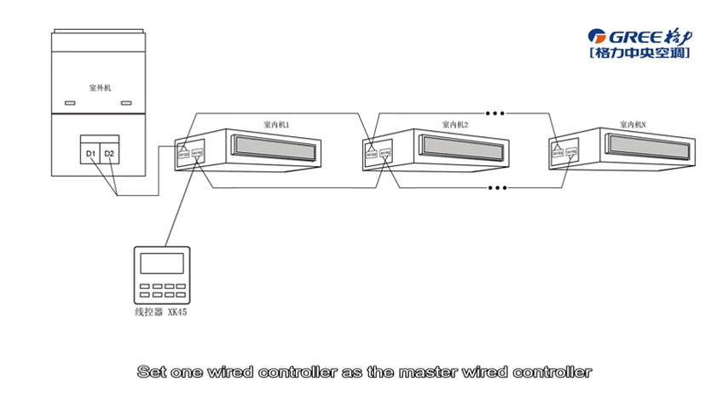Second, connecting the hotel wire controller with another wire controller. If the user needs door control system while he doesn't want to control the indoor unit only by hotel wire controller, another wire controller can be used together with hotel wire controller. For example, wire controller XK45 can be adopted. Set one wire controller as the master wire controller and set the other as the slave one. Then connect the hotel wire controller to door control system so that the unit can be turned on or off by inserting or removing the keycard.

Instructions of door control signal interface of hotel wire controller. The connection between hotel wire controller and indoor unit is the same as the normal wire controller. Hotel wire controller connects to the ports H1 and H2. Note, first, ports N and L are door control power interfaces with 100 to 240 volts, 50 Hz or 60 Hz. Second, ports VCC and GND are door control power interfaces with DC 5 to 24 volts. Users can select only one from 100 to 240 volts and DC 5 to 24 volts.

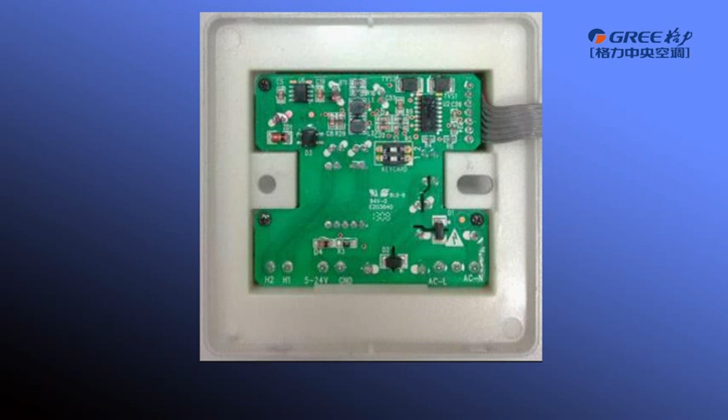To connect the wire controller to the door control system, set the switch 1 of DIP S1 on the base plate of wire controller to on, and then connect the door control signal wire to ports N and L or ports VCC and GND of the terminal block. 6. User training. When the unit operates normally, introduce the daily maintenance methods and the operation instructions of temperature display control device to the user so as to ensure proper and reliable operation of the unit.